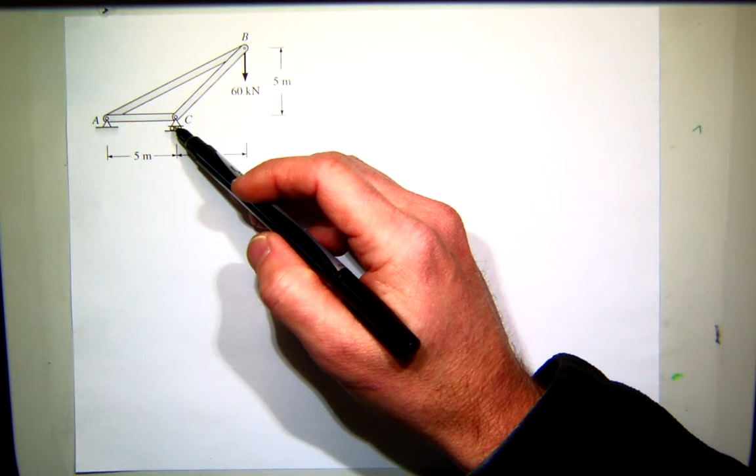And we're probably going to first need to find our reactions. Now, we could be quite successful by just going to B and trying to write joint equations at B. We have 2 unknowns, 2 equations. We could get that, but we would run out of information as we came down here.

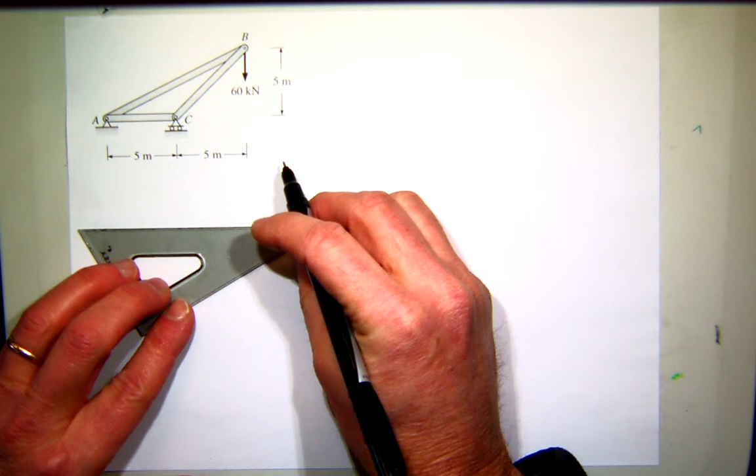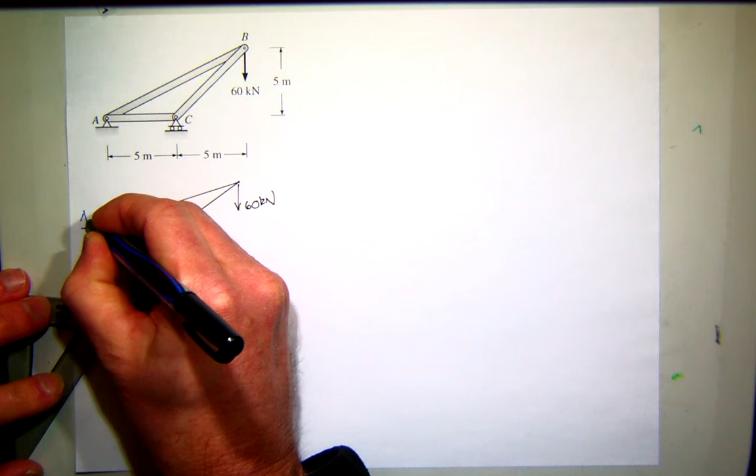So the first thing I'm going to do is find the reactions for that free body. So let me just quickly redraw, not to scale, a system. And this is a 60 kilonewton force. And I'm going to assume at the pin A that I have a force in the X and Y directions, and then at C another force.

So I want to find those reactions. So what should I do first? I can sum moments at A, I can sum forces in the X direction. Both of those will give me one equation and one unknown. I can't sum forces in the Y first. So I'll start with the moment.

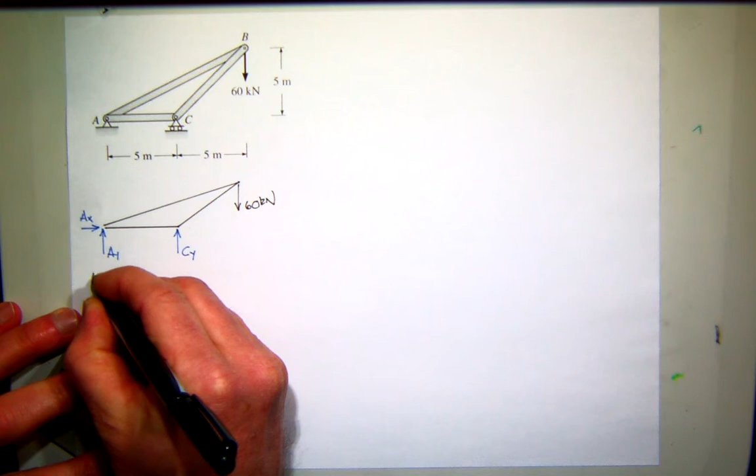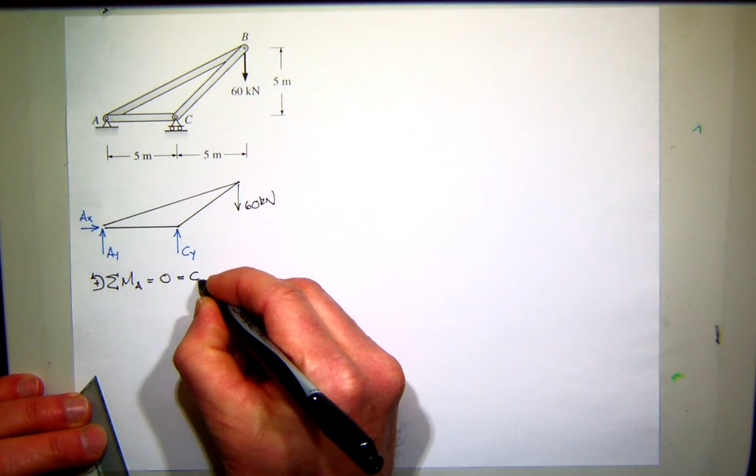So I'll indicate that I'm doing right-hand rule and that we'll sum moments at A, assuming equilibrium. Starting with CY, that creates a positive moment, and the moment arm is 5 meters. Then I have a negative moment created by the 60 kilonewton force, with a moment arm of 10 meters. So it looks like CY is positive, and it's equal to 120. Does that seem reasonable?

So next, I'll come along, and we'll assume up is positive, and I'll sum forces in the Y direction, making sure that's an equilibrium. So I have AY plus CY, and then I have the 60 kilonewton force acting down. So I can solve for AY, and AY looks like it's negative 60.

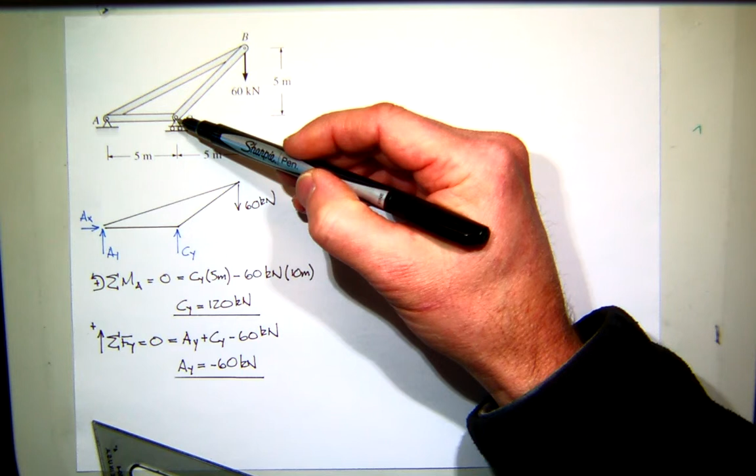So let's check it. Does it make sense that AY is actually acting down here? Yeah, I think so. If you think of C as like the pivot point of a big seesaw, if you push down on one end, you better push down on the other end to keep it balanced. That seems reasonable.

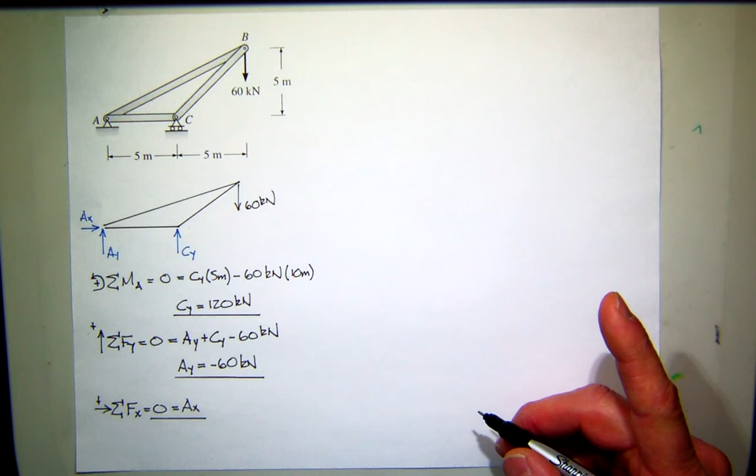And then we'll finish it up by summing forces in the X direction. I'll assume to the right is positive, and all I have, it seems, is AX. So that means AX is 0. Any questions about that? Are there no reactions at B? B, it's all internal. So there are no reactions at B. Now there will be, because that's the first part of the problem.

So let me draw a line here. And now I want to find the internal forces, right? So what are the axial forces? Let's apply our strategy. Is there a bad choice? Should we choose A, C, or B? Well, I think all qualify, because if you look at each joint, there's only 2 unknowns. We can write 2 equations. But there's probably better choices than others.

What about B? Is this a good place to start? I say no. Because you're probably going to think in your head, traditional XY coordinate system, if you look at these 2 forces, each force is going to have an X and a Y component. And it's going to be a little nasty keeping up with it.

However, if you drop down here and look at A and C, with a traditional XY coordinate system, you can see AC only has X, and then your other terms have X and Y. So I think those will be better to deal with. Even though if you've made a mistake at A and C down here, that information will propagate into your solution. Can't help that, but I think you'll be better off there.

So just to do them in alphabetical order, I'm going to start with A. So I'm going to go to joint A. Okay, get ready, this is going to take me a while, so give me a second. I'm going to draw my free body diagram for A. Everybody get that? There it is. Make sure you use a straight edge. Right? It's a point. Okay, it's a bad joke, I know.

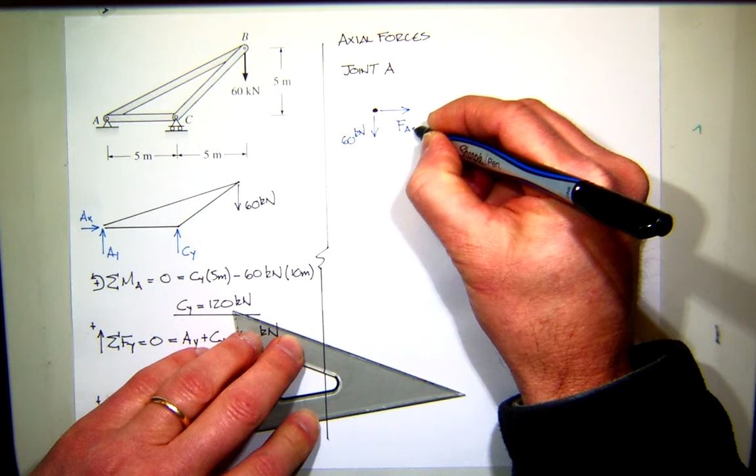Okay? Then I'm going to assume tension force in AC and tension in section AB. Now, what is this slope? Well, it looks like it has a rise of 5 to a run of 10. So that's really a 1 to 2 slope.

You're going to need that to calculate the component. Now, what should I do first? Should I sum forces in the X or sum forces in the Y? Well, if I sum forces in the X, I'll get one equation in two unknowns.

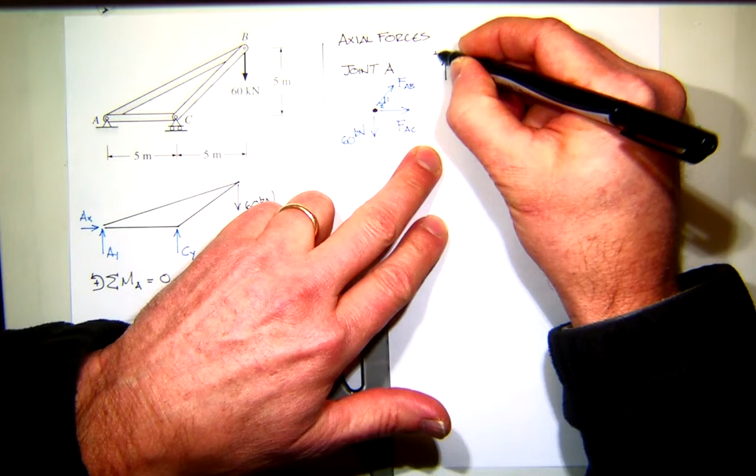So I need to sum forces in the Y. We'll assume up is positive, and I'll sum forces in the Y direction. What do I have in the Y direction? Well, I've got the Y component of AB. So if I have a 1 to 2, what would be the hypotenuse?

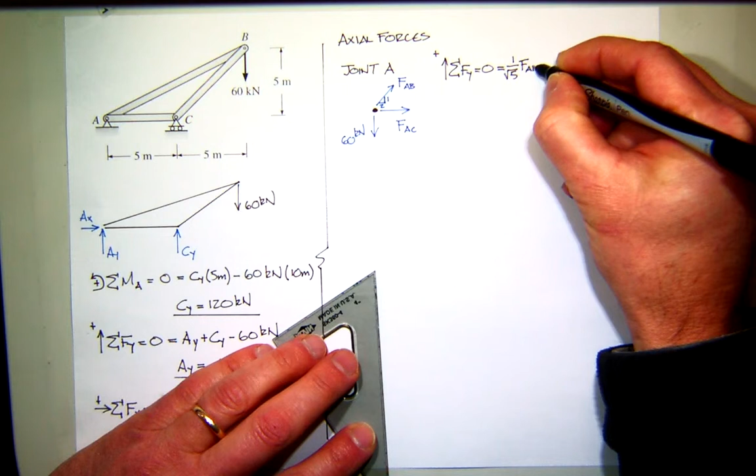Square root of 5, 2 squared plus 1 squared. So the vertical component will be 1 over the square root of 5, force AB. If you don't like that, you would take the arctangent of 1 over 2 and get an angle, then take the sine of the angle, and you would get 1 over the square root of 5. So since I don't want to do that up here, I'm just going to calculate that it's 1 over the square root of 5. Everybody see that? So what would the X component be?

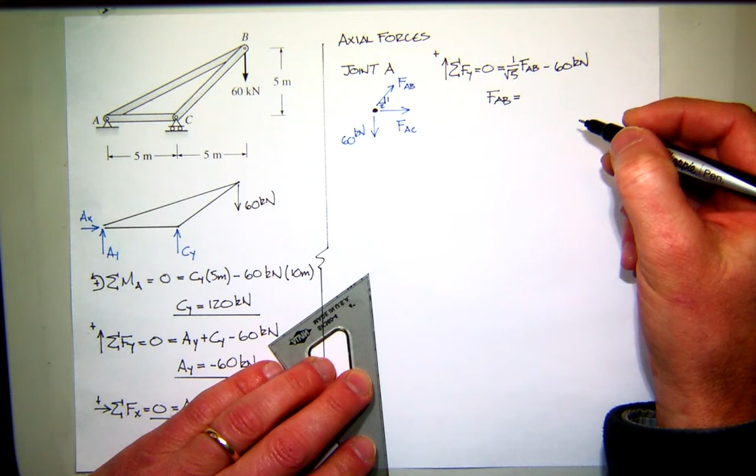2 over the square root of 5. So that's acting up, and then I have minus 60 kilonewtons acting down. So one equation, one unknown. I can solve for the force in AB. It looks like it's going to be positive, and whatever 60 times the square root of 5 is.

Somebody do that for me. 132, I'm guessing. 134. Oh, pretty good guess. 134 point something, Mr. Gargas? 0.16. That's close enough, let's say 0.2. Positive number means compression or tension? Tension.

So now that I have AB, what can I do? Sum forces in the X direction. So what do I have in the X direction? Well, I have the force AC plus 2 over the square root of 5, the force in AB.

So I should be able to solve for AC. Well, AB is positive, I put it in here as positive, so it looks like AC is going to be negative. And that should give me, I'm thinking it's 120. But I'm guessing. Right. I guess it's a good guess.

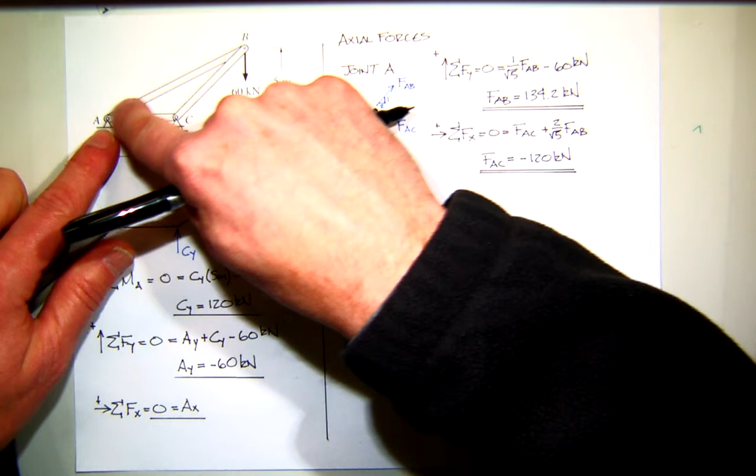All right, let's stop and think about this right now. Let's look back at our element here. Does it make sense that AB is in tension? Yes, I think if you think of this being held down and you pull this, AB is probably going to stretch, it's not going to contract. At the same time, what's going to happen to AC? Well, this whole bottom chord is going to want to push in, so I think AC being in compression seems reasonable.

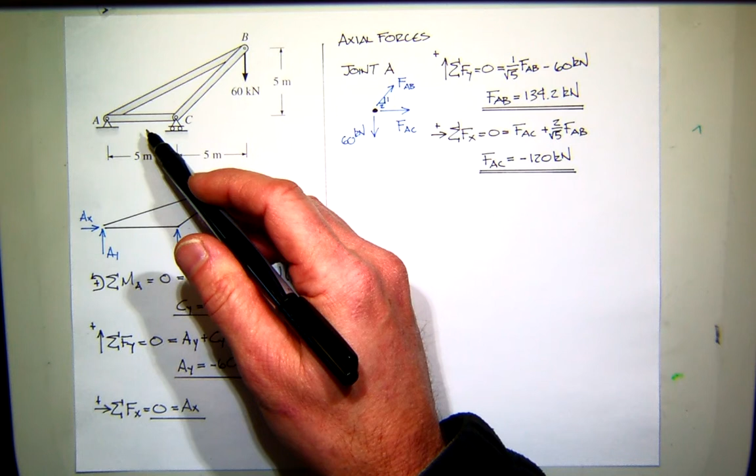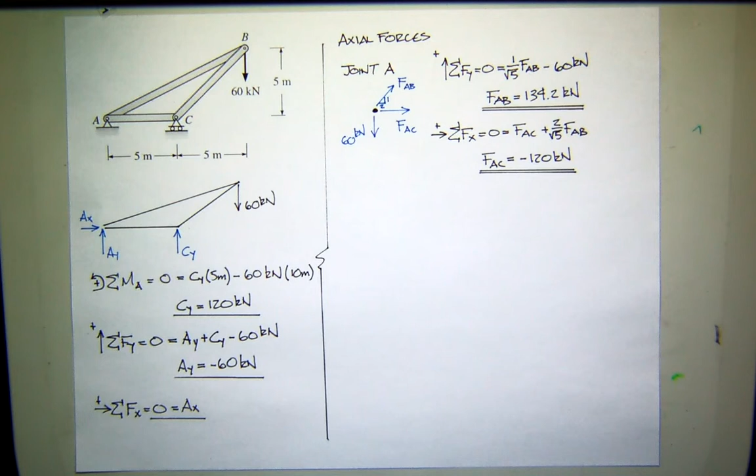So what do you think BC is going to be? Compression. So now that you have a good insight, make sure that works out when you go to the next place. And speaking of which, what's the best place to go, B or C? I would still run away from B, that's some funky geometry up there.

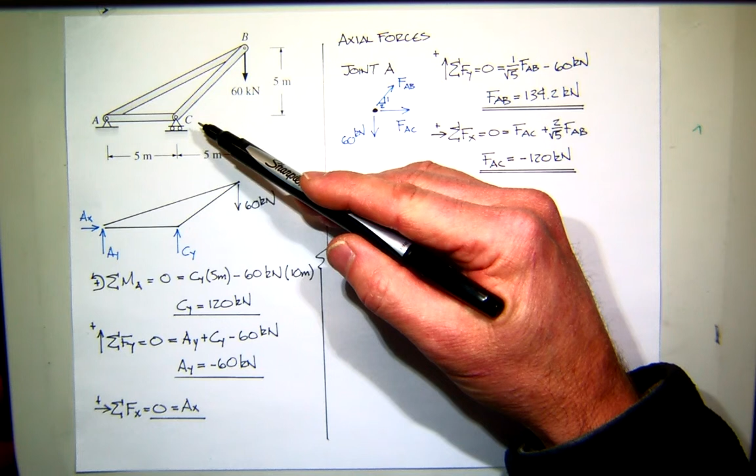So I'm going to go to C. Why? Well, in my standard XY coordinate system, only BC has a Y component. So now I go to joint C.

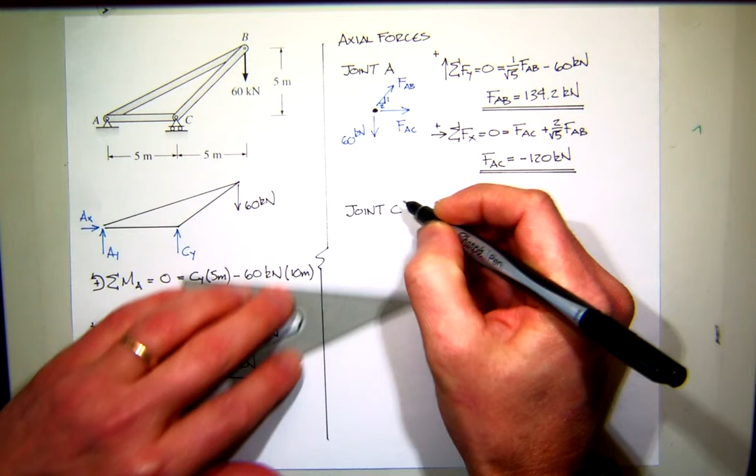I'm going to do this joke one more time because I like it. I'm going to draw my free body diagram at C. Get ready. All right, there it is. All right, I won't do any more.

Okay, so what's happening on that? I got CY, and CY was 120, and it was positive, so that's going up. And I have a tension force in AC, and I have a tension force in BC.

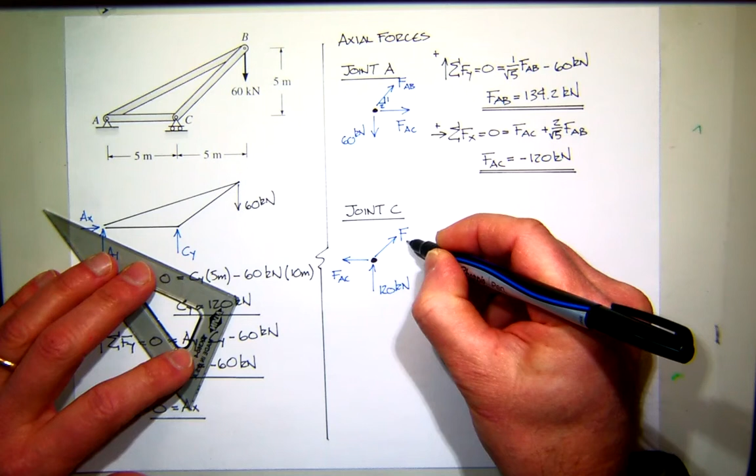What's the slope of BC? What's the rise over run of this? 1:1. Yes, 1:1, 5:5. I thought we established that FAC was in compression. I don't care, I always assume tension. When I actually use the equation, what value am I going to plug in for AC?

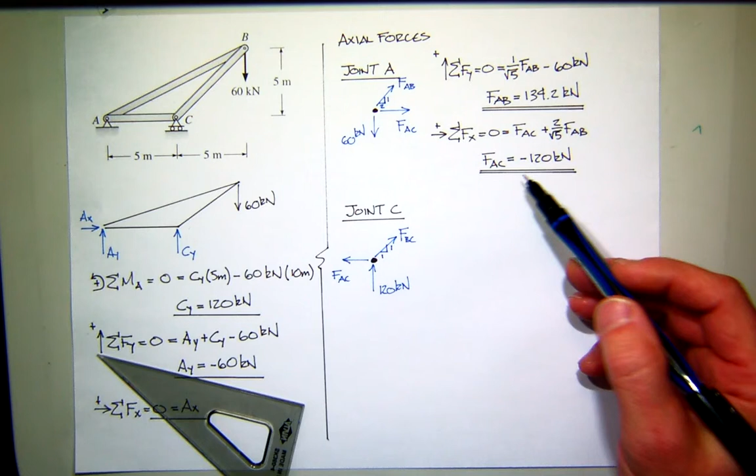Whatever I calculated, which happens to be compression, or a negative value. Now let me ask you this. Can I find BC without including AC? How? Sum forces in the Y direction. Excellent, let's do that.

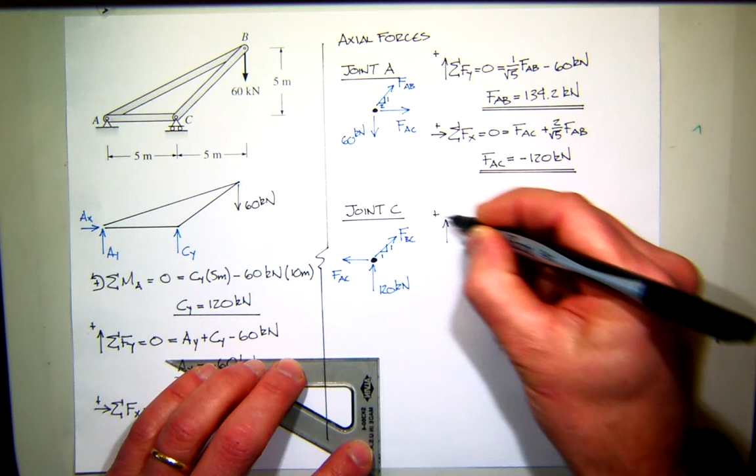So if I sum forces in the Y direction, what do I get? Well, what is the Y component of BC? Well, if you have a 1:1, the hypotenuse is square root of 2. So it'll be 1 over the square root of 2 times BC. That's the Y component, and that's going up. Also acting up is my 120 kilonewton force.

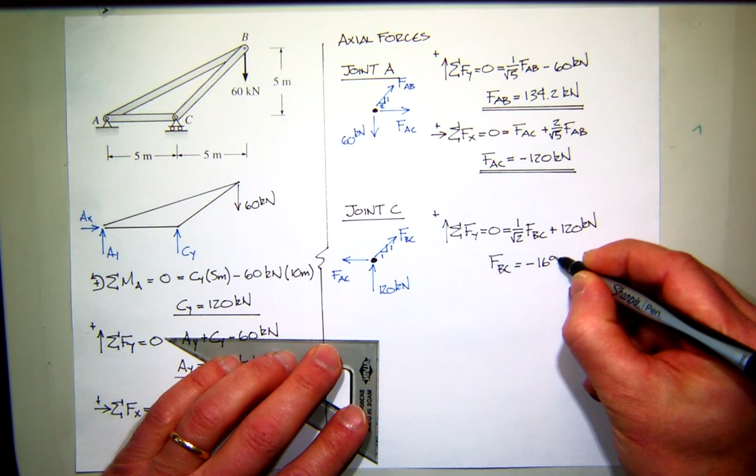So what is the force in BC? Looks like it's negative, good, we thought it was going to be compression. So what's 120 times the square root of 2? Something like 168? 169.7. And we're done.

Now, if you've got lots of time and resources, what would you do next just to make sure? You would sum forces in the X direction, and you could solve for AC. And you better get the same answer, if you don't, there's an error somewhere. Another way to do it would be to put your negative 120 in here and your new value for BC and make sure it is in equilibrium. So there's a way to check when you get to this point.

Okay? Any questions about this problem? All right, then I'll stop it.